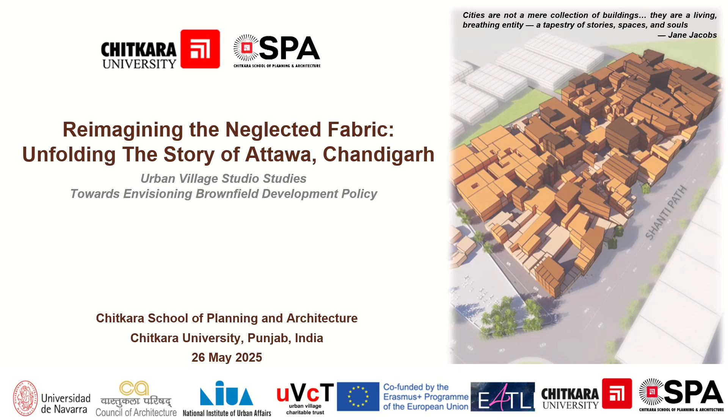Urban villages lie at the intersection of tradition and transformation, where rural life meets unplanned urban expansion, often without structured integration. Despite their growth, they present both challenges and opportunities for inclusive, resilient, and context sensitive development. This presentation aims to uncover the hidden potential of these often overlooked urban pockets.

This project began with a quest to answer what happens to these urban villages that lie between the lines of planning. And thus, under the aegis of UVCT, we initiated the Urban Village Studio as an endeavor for studying urban villages towards envisioning brownfield development policy.

Our journey to reimagine Attawa is a meticulously structured process across several phases: site acquaintance, perception studies, digitization, preparation, physical site surveys, beginning with the context which laid the foundation by exploring the historical, cultural, and spatial dynamics of villages in Chandigarh, the action area identifying Attawa as a representative case, reconnaissance survey involving site visits, pilot surveys, followed by data analysis for integrating all collected quantitative and qualitative data, phase 5 including interventions and policy recommendations which translated findings into proposals for spatial improvement, and finally phase 6, which was the application of AR/VR technology, enabling immersive visualization of design interventions, enhancing participatory planning and communication with stakeholders.

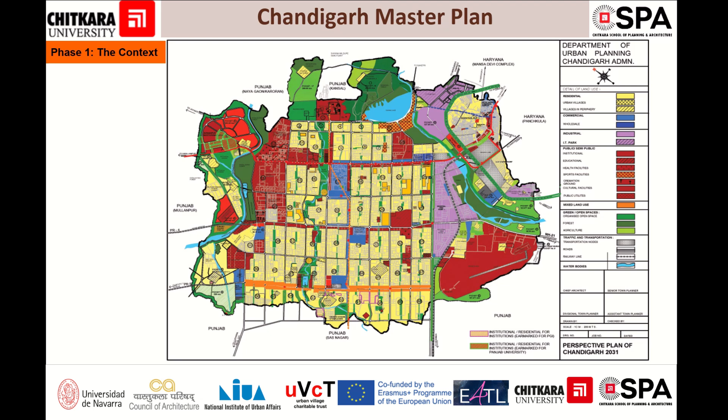Following on, our story begins by examining the Chandigarh Master Plan, working backwards to trace the city's evolution. Given its proximity to numerous urban villages, our aim was to understand how the city developed and how these villages either diminished, adapted, or thrived amidst urban expansion. Chandigarh was meticulously planned to be the administrative heart of the newly formed Punjab and a haven for refugees after independence. Nestled at the foothills of the Himalayas, Chandigarh's development unfolded in phases with a grid-like setting designed by Corbusier. It developed in 3 phases with clear zoning and planning ideals.

In its initial phase, it was built on a clean slate, acquiring both agricultural land and existing settlements. However, in the second phase of development, a different approach was taken for 4 specific villages: Burail, Attawa, Buterla, and Badheri. The evolution of Chandigarh's urban villages was shaped by the 1952 Periphery Control Act and the 1966 Punjab reorganization. While phase 1 villages were razed, most phase 2 villages retained some Abadi areas, like Attawa. These villages evolved informally, creating gaps in planning, infrastructure, and governance within a modern cityscape.

Chandigarh embodied order, progress, and architectural innovation, yet nestled within its grid-like structure are pre-existing settlements that continued to evolve alongside the city's modern planning ideals: these urban villages. Chandigarh contains 22 urban villages, both sectoral and non-sectoral, spread across phases. Looking at the sectoral villages, each of them differs in development and integration, and analyzing their current status reveals spatial inequality, lack of infrastructure, and the need for targeted policy reforms. Attawa is amongst those in the second phase, lying in Sector 42.

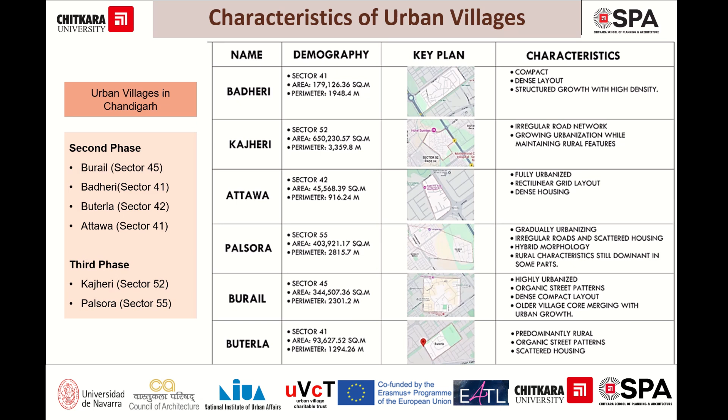As observers of the urban realm, we found ourselves intrigued not by the grand sectors and the symmetrical grids of Chandigarh, but by the irregular, informal, inherited Attawa. An urban village encased within the modern city's bones stood out, not for its design, but for its defiance. It refused to be forgotten. Caught between rural legacy and urban pressure, Attawa symbolizes a brownfield in limbo, land that is lived in, loved, yet left behind by formal development.

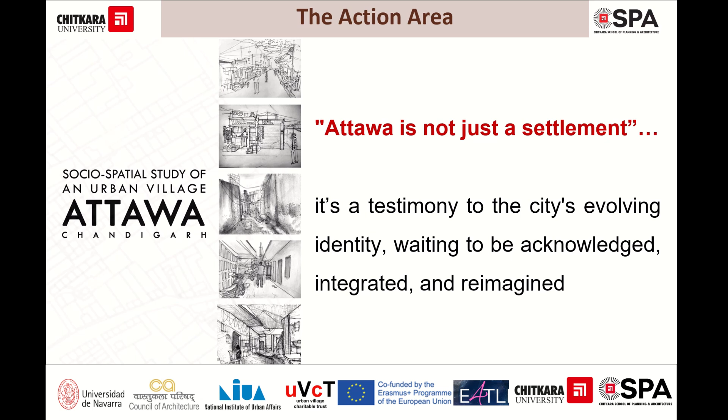This studio emerged from the need to explore this contradiction, to understand how we as future planners and architects can bridge the gap between policy and people, between structured intent and lived reality. And so the genesis of this project was not in the blueprints, but in the lived voices, the visible cracks, and the silent resilience of Attawa.

Coming on to the context and location of Attawa, which is nestled amidst the planned sectoral grid of Chandigarh, it has a strategic location in Sector 42, which is notable. It lies adjacent to major roads such as V3 and the stadium roads and sectors, making it well connected.

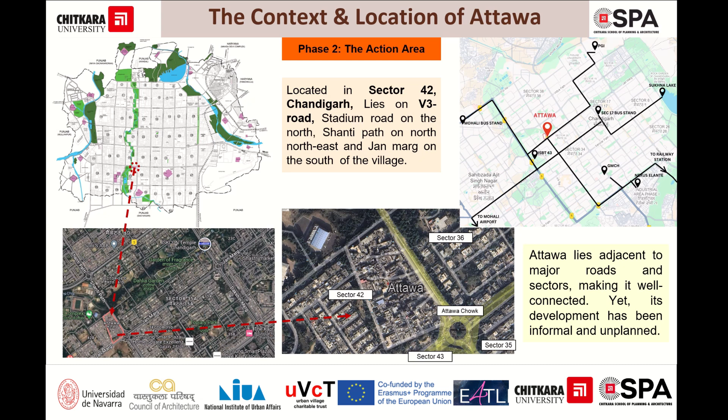It began as a rural agrarian settlement on the periphery of Chandigarh. With the city's expansion, it was absorbed into the planned urban grid as a part of Sector 42. Over time, Attawa transitioned into a densely populated urban village with merely 2% unbuilt in 2024.

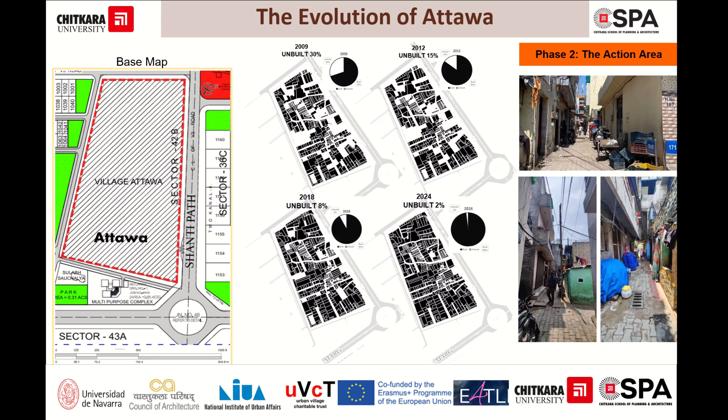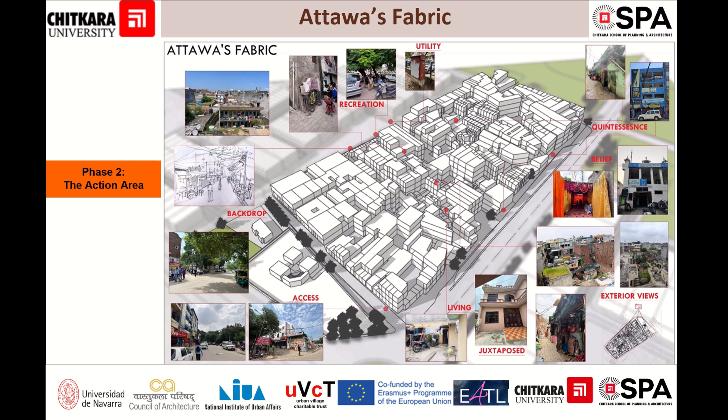Attawa's fabric is a vibrant blend of tradition and transition. Narrow lanes, mixed-use structures, and dense housing reflect its organic growth. Amidst the formal grid of Chandigarh's sectors, Attawa retains a distinct identity, marked by socio-cultural continuity, informal economies, and evolving land use shaped by community needs and urban pressures. Here is a video clip that showcases the on-site documentation.

Exiting from phase 3, which was the reconnaissance survey, is phase 4, data analysis. The figure ground relationship reveals a compact and dense built form with minimal open spaces. The built-up areas dominate the landscape, leaving limited voids for green spaces or urban public use.

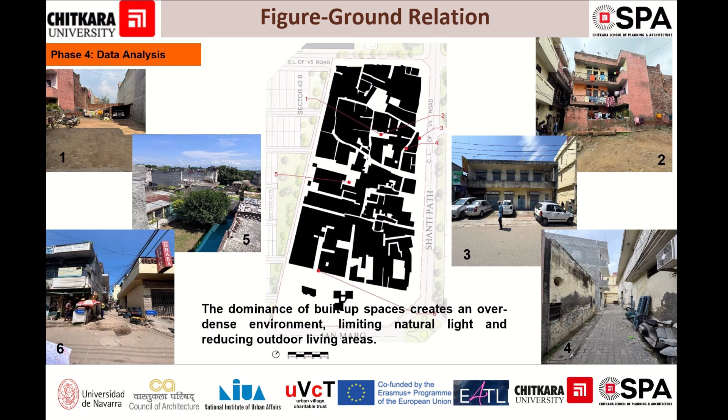The demographic study indicates a significant population increase, recording a growth rate of 30.1%. This steady increase in population and density reflects the ongoing urbanization of Attawa, transforming it from a rural settlement into an integrated part of Chandigarh's urban framework.

The economy is largely informal, with the residents engaged in small business, service jobs, and daily labor. The workforce participation rate is relatively low, especially among women, indicating gender disparities in employment. The village, though, has a literacy rate of 78%, lower than surrounding urban areas due to limited access to higher education.

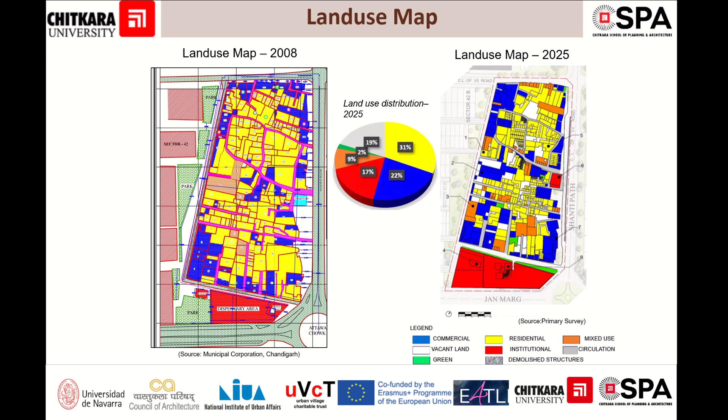Between 2008 and 2025, it witnessed a notable shift towards mixed-use development. Residential plots gradually integrated commercial activities, shops, workshops, and rentals, responding to urban demand and economic opportunity.

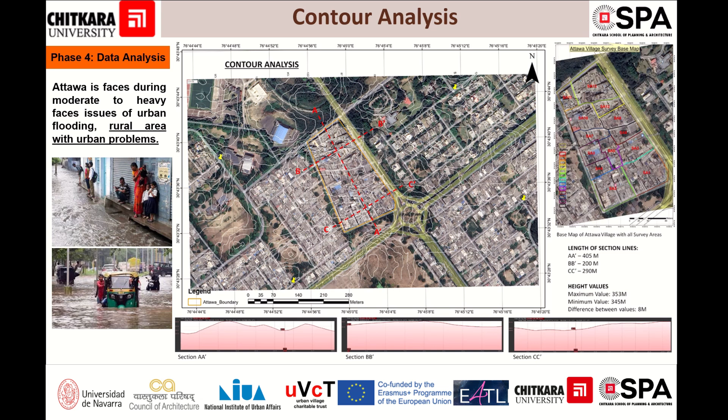The contour analysis indicates relatively flat terrain with minimal elevation variation, contributing to poor natural drainage, leading to frequent water stagnation during rainfall. Impervious surfaces across the village further hinder percolation, exacerbating flood risks.

Attawa exhibits an irregular and organic street pattern typical of unplanned urban villages. The internal roads are narrow, with limited hierarchy and poor connectivity to surrounding sectors. Encroachments and mixed-use developments along streets further restrict movement, especially for vehicles and emergency services.

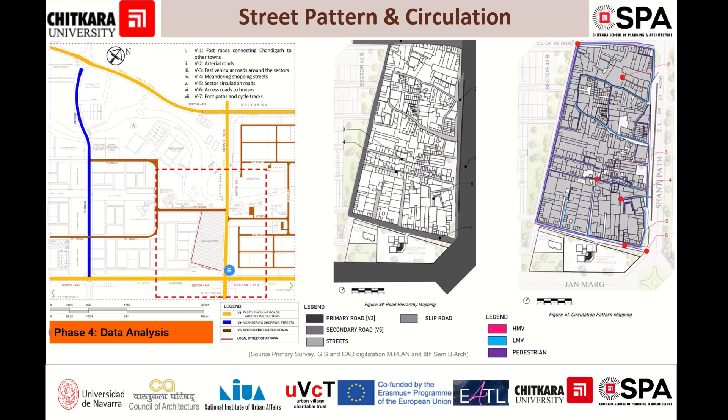Attawa has basic social infrastructure, including a few schools, religious centers, and local parks. However, these facilities are unevenly distributed and inadequately maintained. Also, the lack of proper community halls, libraries, and youth engagement further restricts social development.

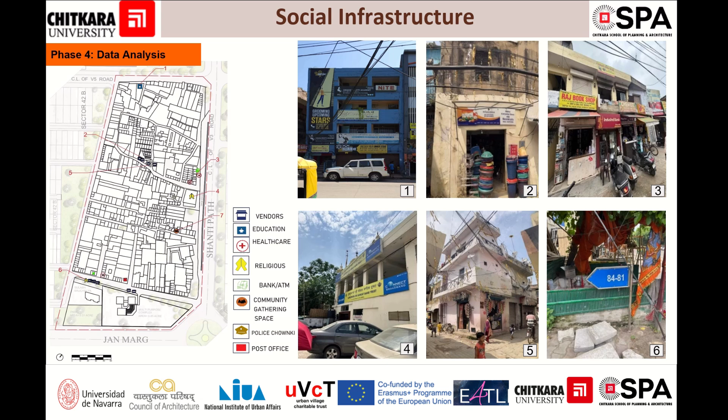Key landmarks like GMHS, a sports complex, and Kala Sagar lie nearby. Attawa has schools and religious sites, but limited health and recreational facilities affect residents' quality of life. It mostly depends upon the surrounding sectors 42 and 43 for infrastructure.

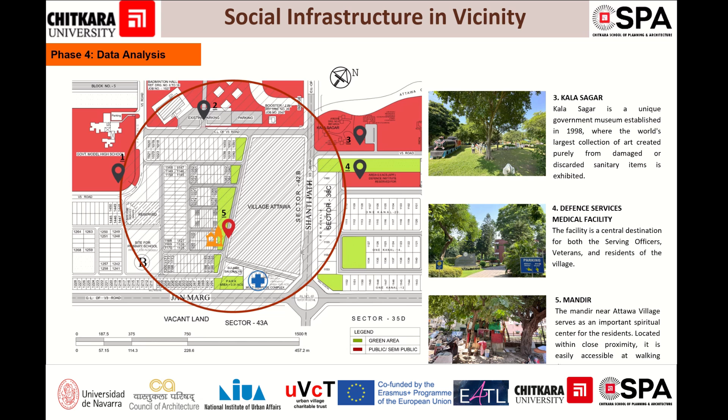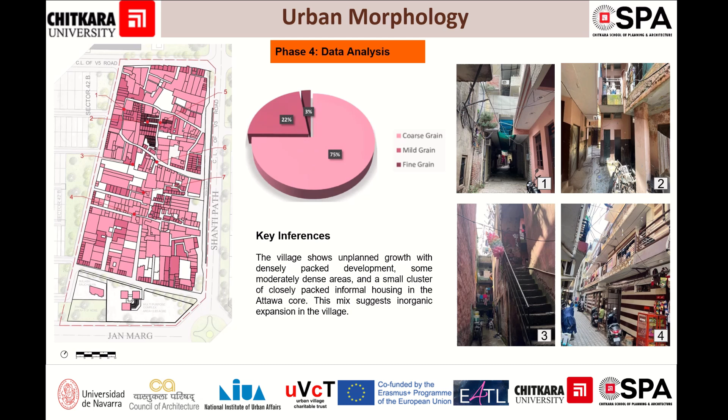With nearly half of the properties on rent, it has led to renting home spaces as shops, fostering mixed-use growth, boosting incomes, and of course adding to local resilience. Migration drives population growth, which in turn strains existing infrastructure. It indicates that lack of planning affecting the overall quality of life is evident in the residents.

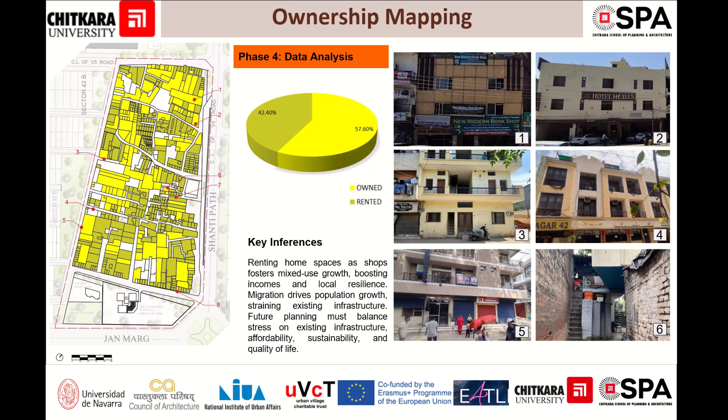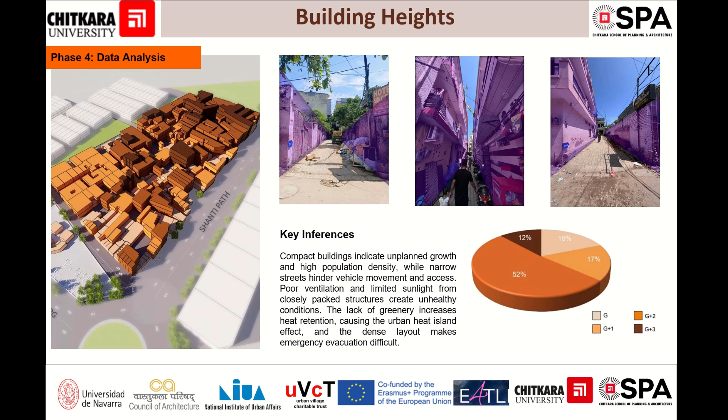Further, most buildings are G+2 and compactly organized, highlighting congested areas with poor ventilation, lack of sunlight, and challenging emergency access. These conditions create health risks and limit livability.

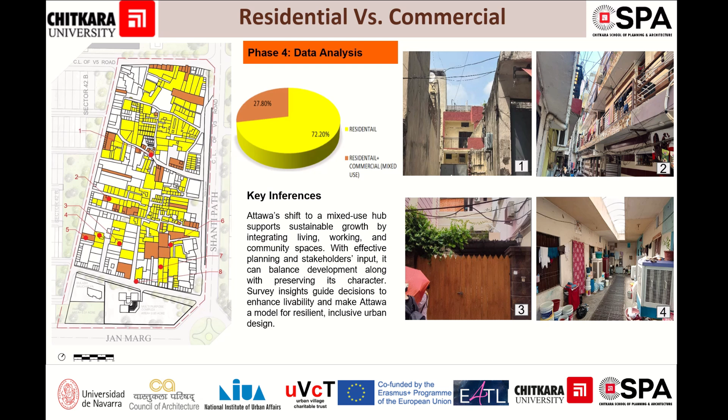Furthermore, with an unbalanced mix of residential and commercial, there is congestion, inadequate infrastructure, and strain on public services. Absence of zoning regulations has led to incompatible land uses affecting livability and environmental quality. There is a mix of all types of commercial activities happening, which has led to unauthorized commercial properties proliferating due to weak planning, governance, and regulatory oversight, as is evident here.

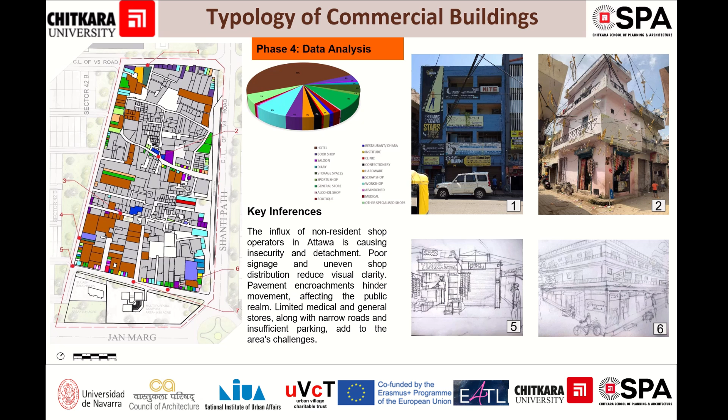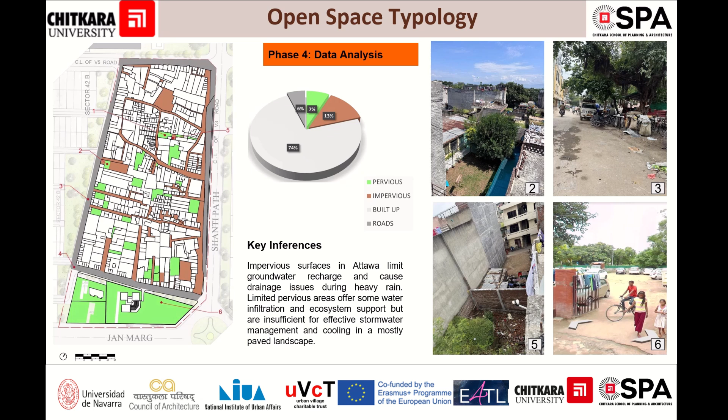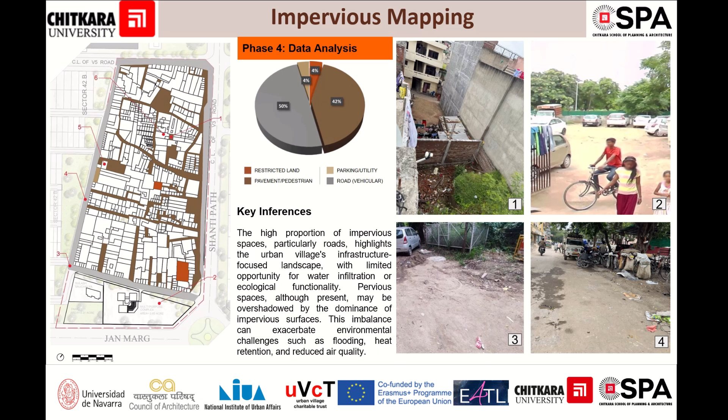Impervious surface mapping of Attawa reveals a high concentration of built-up areas, paved roads, and concrete surfaces, significantly limiting natural water infiltration, which becomes an inherent problem for surface runoff and leads to urban flooding. Pervious mapping highlights the limited distribution of surfaces that allow water infiltration, such as vacant plots, small green patches, and unpaved open spaces.

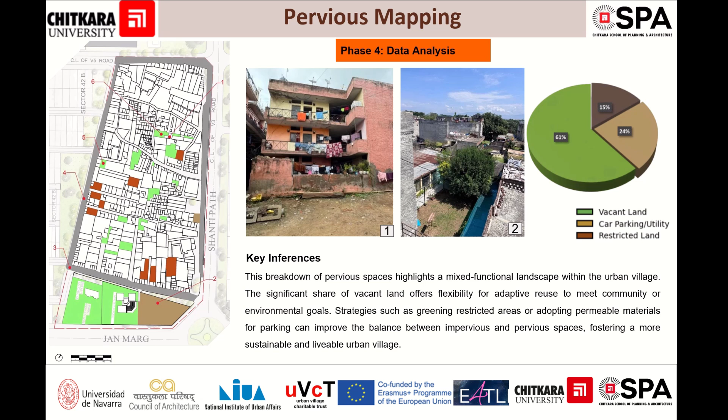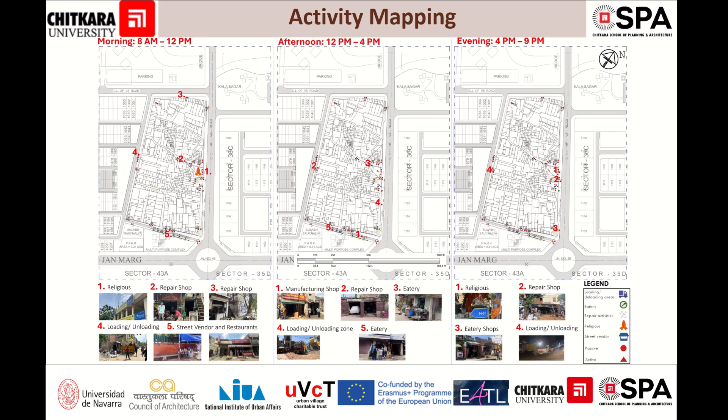The activity mapping reveals a mix of residential, commercial, and informal uses concentrated along key streets and junctions. Peak period activity mapping indicates the dominating activities during different time zones. With commercial areas active throughout the day, it further depicts vibrant street life and continuous activity, highlighting the village's dynamic socio-economic environment.

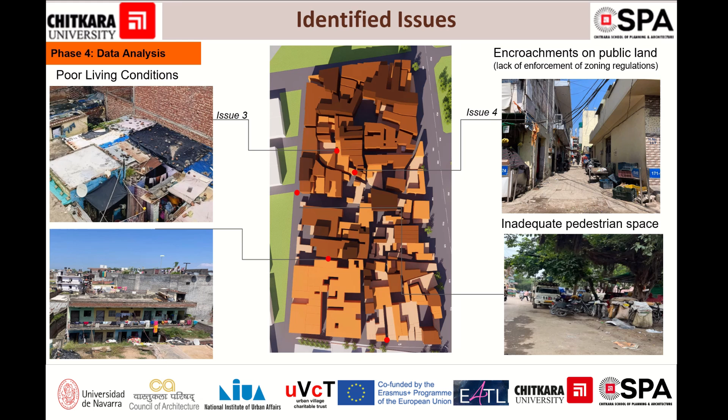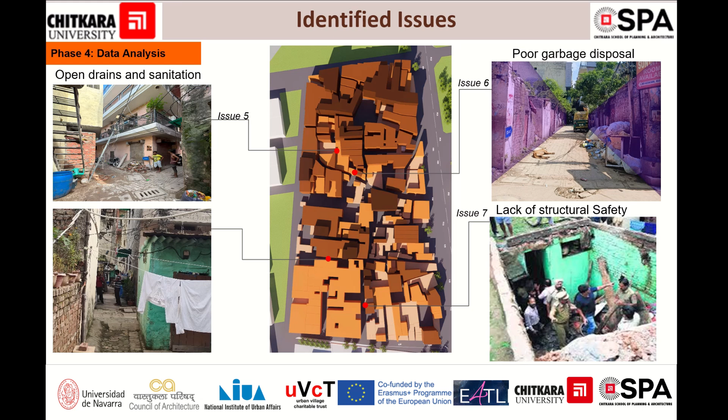From the analysis of the survey, 8 core issues were identified. Spatial issues such as lack of open spaces and lack of parking. Furthermore, there are accessibility and mobility issues such as inadequate pedestrian spaces because of congested internal road networks, also leading to poor last mile connectivity. There are also issues of lack of structural safety, and of course policy and governance issues because of no clear administrative classification, overlapping jurisdiction between municipal and state offices, and limited community participation in the decision making process.

The next step was phase 5, which is the interventions, where the issues were further analyzed through a 5-day capacity building workshop that explored innovative approaches to reimagining urban villages by blending traditional wisdom with contemporary urban design. Students developed critical thinking, participatory design, and spatial analysis to address challenges of density, infrastructure, and identity. The workshop focused on identifying key issues through participatory brainstorming sessions, which were then synthesized into a comprehensive SWOT analysis.

Moving on to the SWOT analysis, the strengths were primarily the strategic location of Attawa, its mixed-use character, and the availability of brownfield pockets which promoted development. The inherent weaknesses in Attawa were informal and unregulated growth, infrastructure deficits, ambiguities in land ownership and tenure, and low digital technological penetration.

Of course, it had a lot of opportunities such as policy integration for brownfield regeneration, technology-enabled planning interventions, community-based regeneration, and the potential for socio-economic upliftment by leveraging Chandigarh's ongoing development for improved infrastructure and real estate investment. However, there were some threats such as gentrification and displacement risks, policy and administrative gaps, resistance to change by the community, as well as environmental vulnerabilities.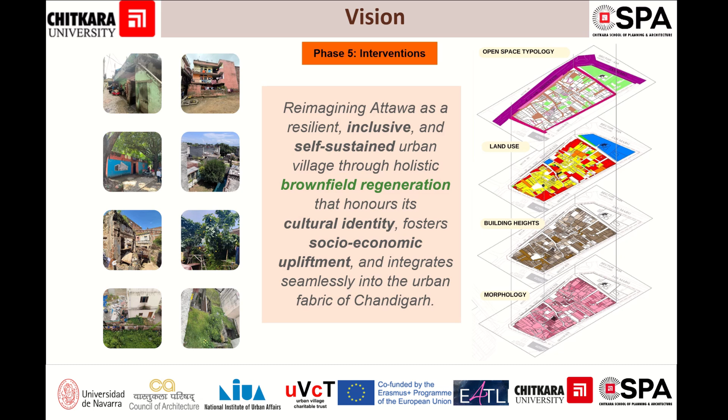So, building upon our insights from this SWOT analysis, we aim to address the pressing challenges while unlocking the hidden potential of Attawa. This led us to articulate a comprehensive vision to reimagine Attawa as a resilient, inclusive, and self-sustained urban village. This transformation is rooted in a holistic brownfield regeneration approach, one that respects and retains the identity, lifts its socio-economic fabric, and allows it to integrate organically into the evolving urban landscape of Chandigarh.

To bring this vision to life, it was essential to define the broader strategic goals and the detailed on-ground actions. At the macro level, we focused on community and connectivity, emphasizing stronger social bonds, local economic revitalization, walkable environments, and improved mobility solutions to empower the people of Attawa. On the micro scale, our interventions aimed at improving core physical infrastructure such as roads, water systems, and sanitation, alongside expanding green spaces, designing inclusive areas, reinforcing ecological corridors, all in order to preserve Attawa's identity.

Flexible street alignments, negotiated land reorganizations, and the creation of community-centric nodes became central to our connectivity strategy. We identified key zones along primary and secondary movement corridors and introduced gathering spaces designed as economic clusters with street furniture, local artifacts, pocket parks, and vibrant public zones to bring life and purpose to these places.

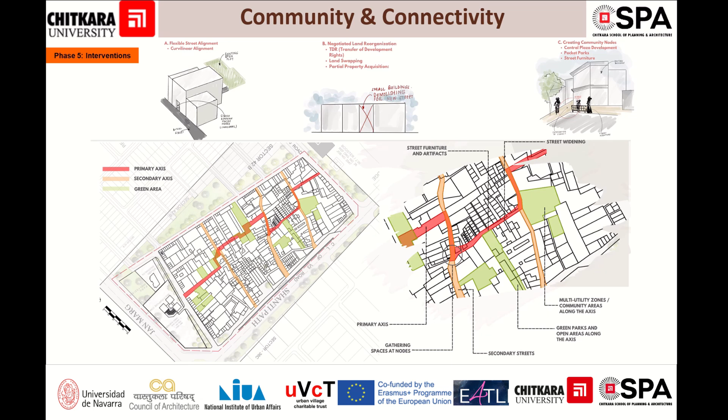We proposed tools like transfer of development rights, land swapping, and selective property acquisition to redevelop underutilized or structurally weak buildings. This allowed us to free up space for new, well-connected streets and open pockets, reducing congestion while weaving in new communal hubs that support local interaction and mobility.

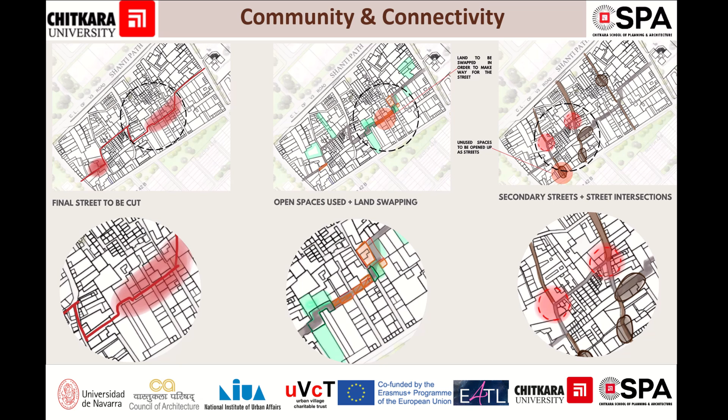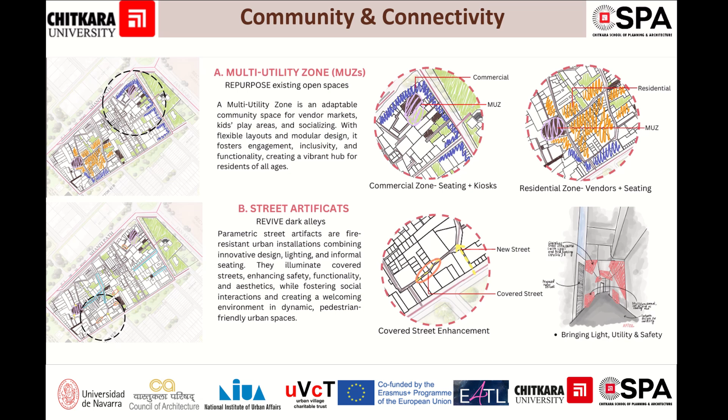Multi-utility zones were introduced in repurposed open areas to accommodate diverse urban functions, ranging from kiosks, vendor stalls, and play zones, to seating, covered spaces, and informal market spaces. Dark, underused alleys were transformed with parametric street installations and fire-safe urban elements. We envisioned wider streets not just for traffic but to redefine the character, introducing informal gathering spots that reflect the vibrancy of the local culture and encourage social cohesion.

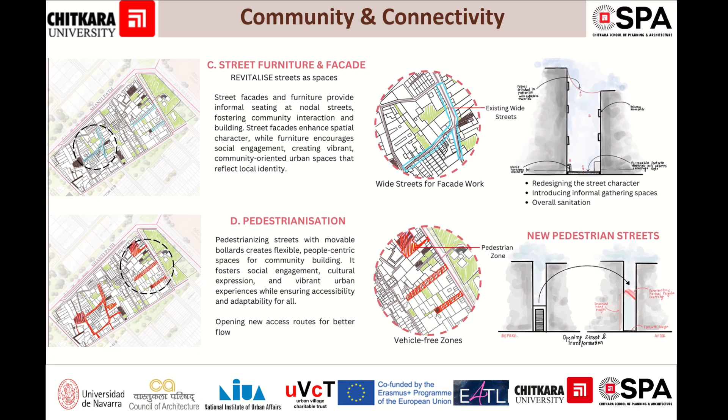Pedestrianization measures such as bollards and shared street concepts were proposed to foster safer, more accessible and adaptive urban spaces that invite people to walk, pause and interact. Targeted identification of open pockets enabled us to introduce well-planned green spaces, parks and public amenities like toilets, thereby strengthening both the ecological and infrastructural backbone of this village. Each intervention was carefully designed to align with the existing vehicular routes and service networks, ensuring practical, implementable solutions that respond to Attawa's present needs while accommodating its future growth.

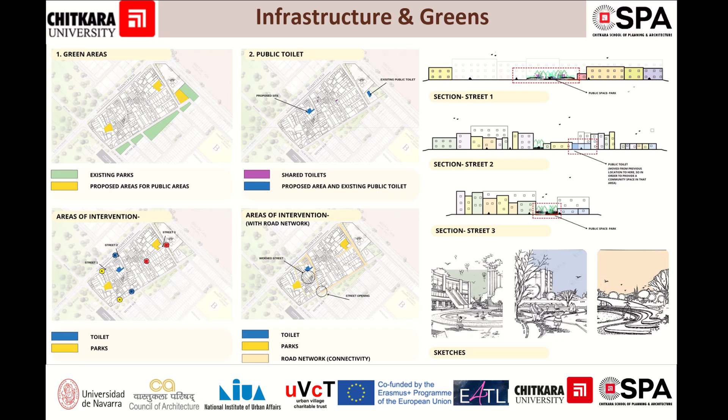Based on the vision, the community integration, physical improvements and ecological considerations, we now present a set of brownfield policy recommendations. The recommendations focus on 7 key areas: context-sensitive urban planning, which is development of village-specific planning guidelines within the Chandigarh Master Plan, in situ redevelopment with community participation, economic revitalization and skill development, land ownership and tenure regularization, sustainable and climate-responsive design, which is a mandate, green infrastructure, incentivizing adaptive reuse and resource-efficient building materials, and encouraging cooling strategies and integration of technology and digital mapping.

Furthermore, institutional and policy integration: establish a brownfield regeneration cell, integrate policies with national missions, and encourage public-private partnership. Post this came the opportunity to participate in the workshop on virtual reality and artificial intelligence for urban village studies. This is a small video clip to show how learnings from the workshop were drawn for the technology-driven outcomes that followed.

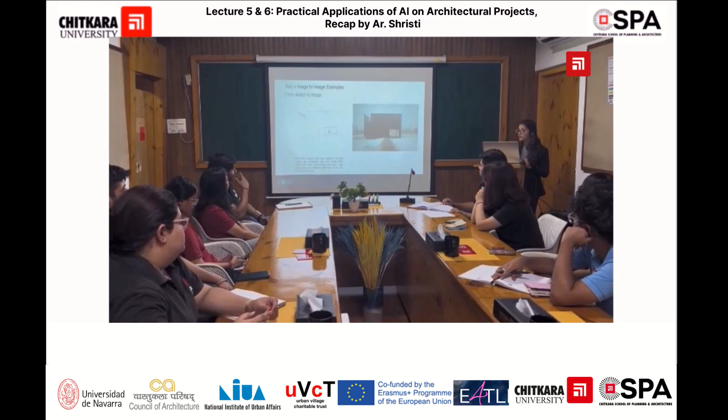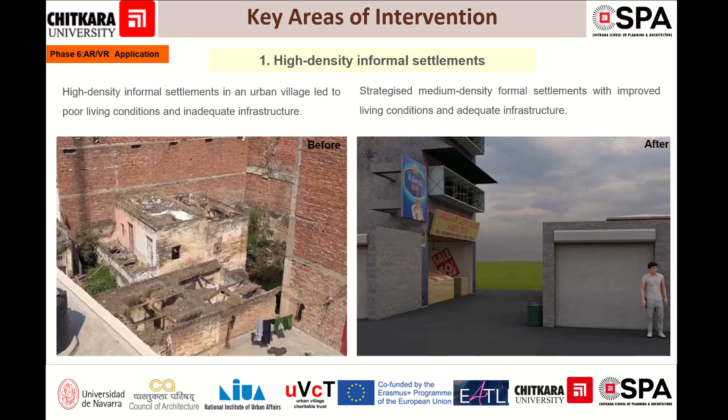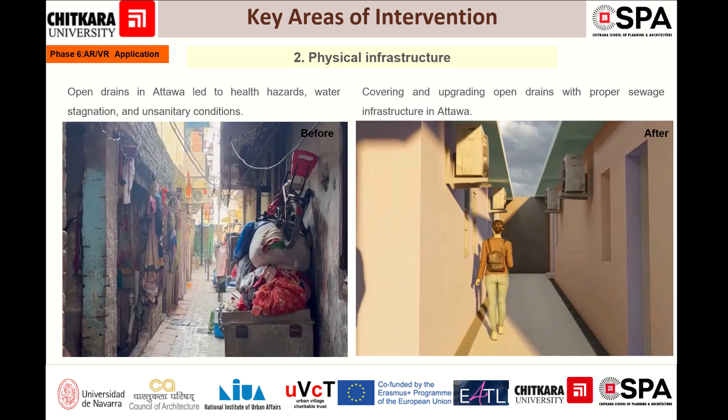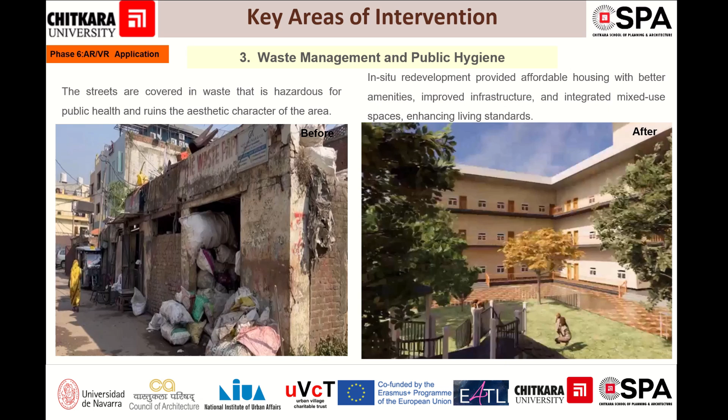Waste management and public hygiene: basically the streets of Attawa that were often covered in hazardous waste, marring the area's aesthetic character and posing health risks, were proposed to provide affordable housing with better amenities, improved infrastructure, and integrated spaces enhancing overall standards and cleanliness. The intervention further focuses on underutilized open spaces, specifically lack of green spaces, where we propose providing green spaces on vacant land, transforming neglected areas into valuable community assets.

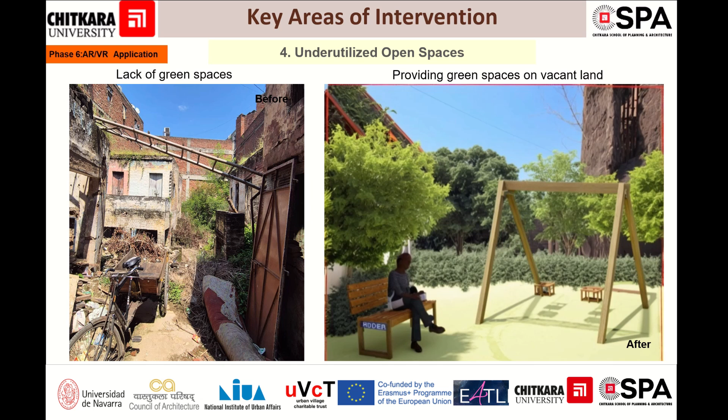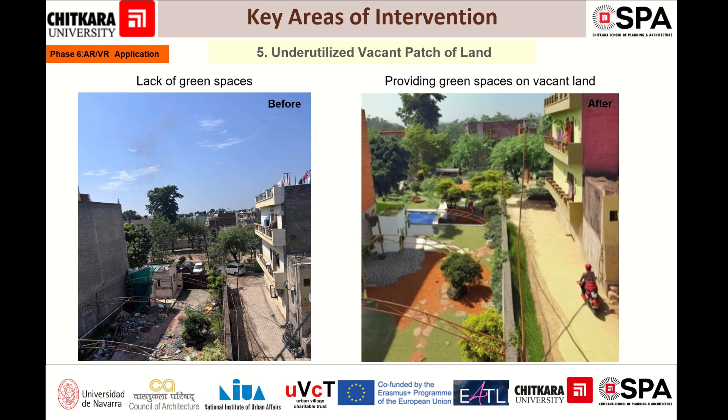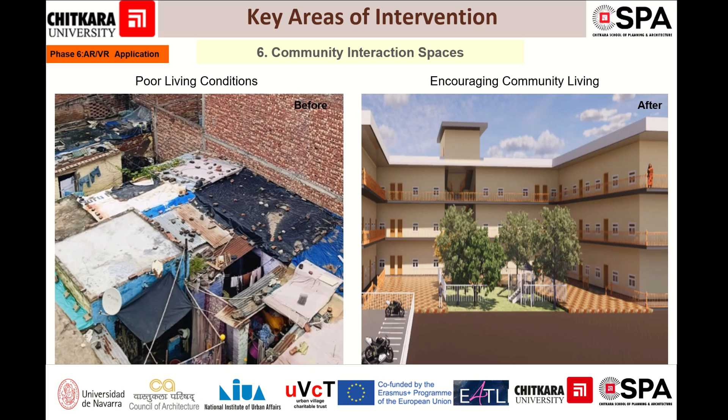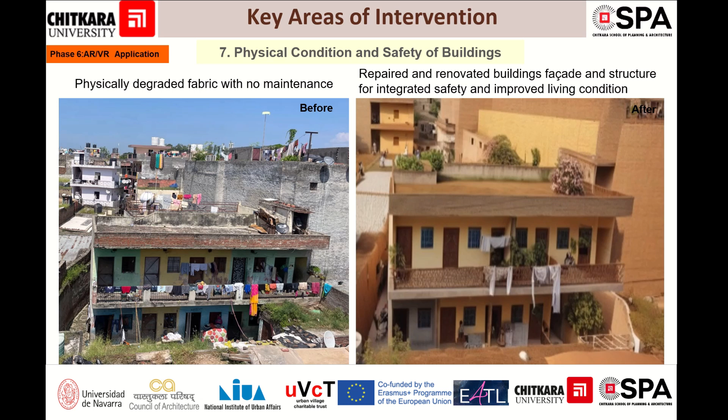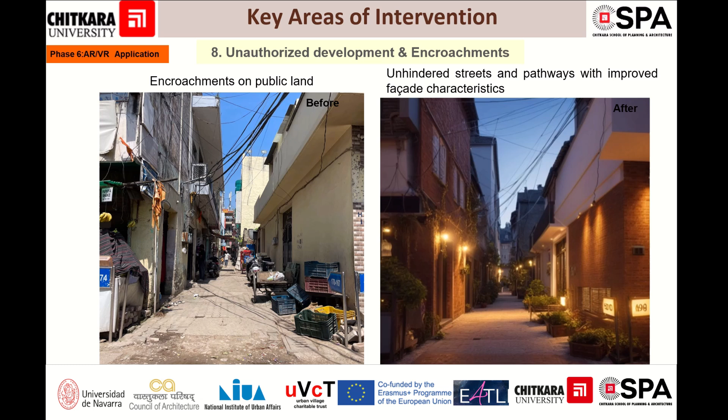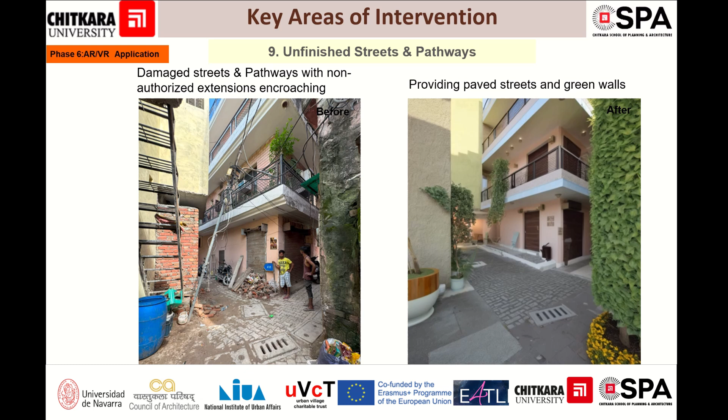Furthermore, the unauthorized developments and encroachments include addressing the issue of this encroachment on public land. The solution aims for unhindered street pathways with improved facade characteristics, creating clear and accessible public spaces. Unfinished streets and pathways, where damaged streets and pathways had unauthorized extensions encroaching upon them. The intervention is to provide pathways which were paved and had green walls enhancing functionality and aesthetic. The final intervention focuses on lack of walkable pathways due to inadequate pedestrian space, where the solution involves providing adequate, unobstructed and vehicular-free pedestrian pathways, ensuring safe and accessible routes for residents.

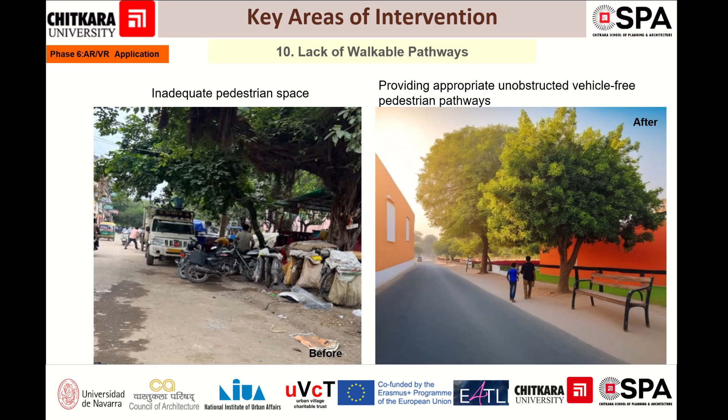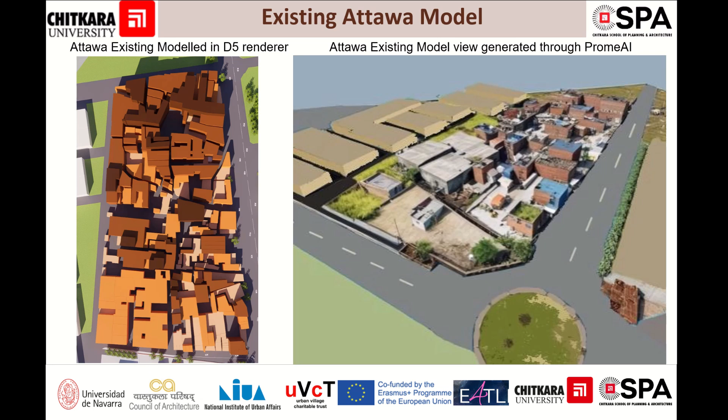To visualize our understanding of Attawa's current state, we created an existing Attawa model. This was initially rendered in D5 Render and further generated as a model view through PromeAI. This process allowed for a detailed and realistic representation of the village's existing conditions. Building on our understanding, we then developed a proposed Attawa model. This was generated through PromeAI and further iterated in Visoid, showcasing our proposed interventions and how Attawa could be transformed into a more livable and sustainable urban village. So this is just a quick recap of how the interventions were proposed and have been applied through immersive technologies.

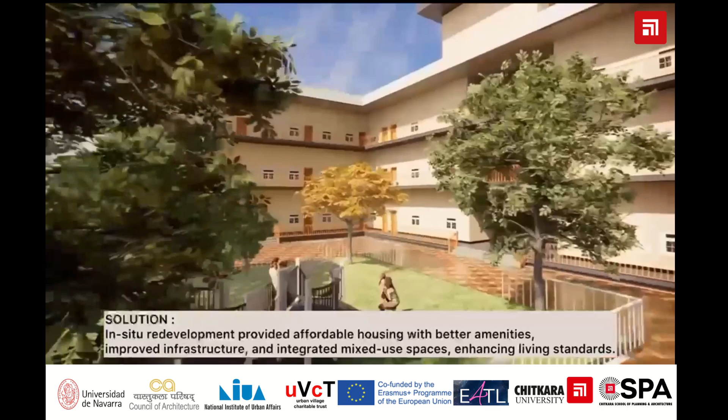So through this entire exercise, the lessons learned were infinite and immense. Urban villages are not relics of the past. The gaps that exist between formal planning mechanisms and informal growth, especially in the brownfield context, need addressal. The use of technology in mapping, data collection and analysis becomes imperative, and most importantly, this outlined and underlined the power of participatory engagement. The way forward is integrating it more robustly into our architectural curriculum and fostering cross-disciplinary collaboration. Furthermore, bringing to you is a capacity building video where the community was engaged through AR and VR.